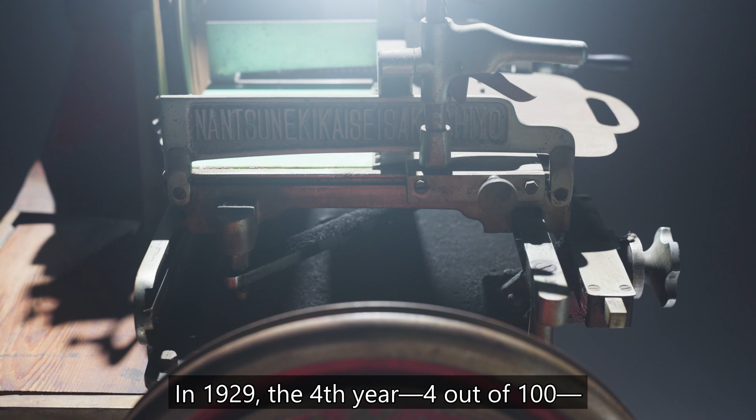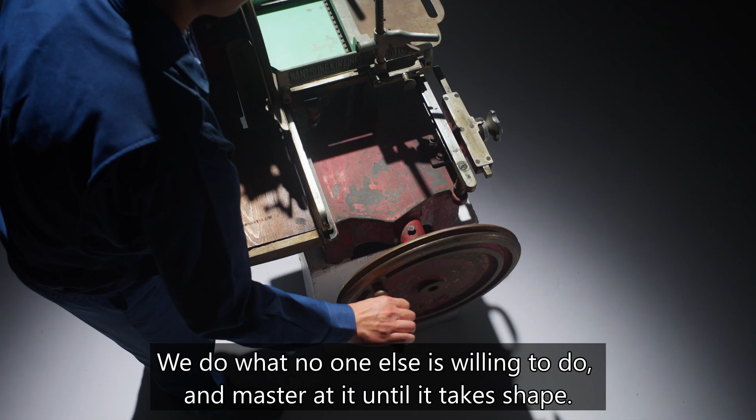In 1929, the fourth year out of 100, a request came in to manufacture replacement blades for ham and bacon slicers from the Dutch company, Berkel. We do what no one else is willing to do, and master it until it takes shape. From here, we took another big, significant step toward the future of food. We began manufacturing and selling Japan's first meat slicer.

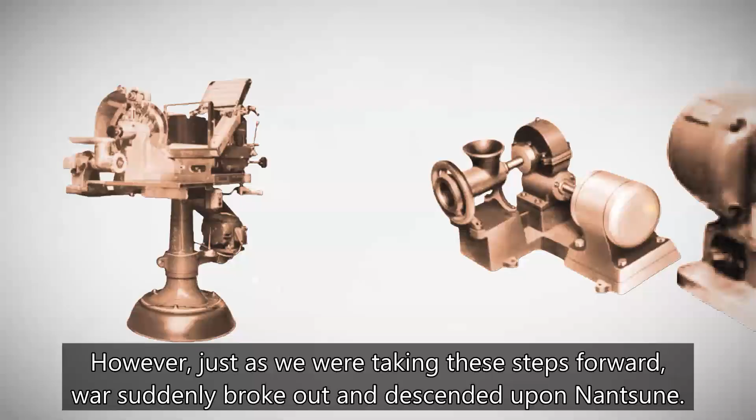We registered the Nantsune trademark and changed our company name to Nantsune Works. We developed the first domestically produced meat slicer. We progressed from the cutlery business into meat processing and machinery manufacturing. However, just as we were taking these steps forward, war suddenly broke out and descended upon Nantsune.

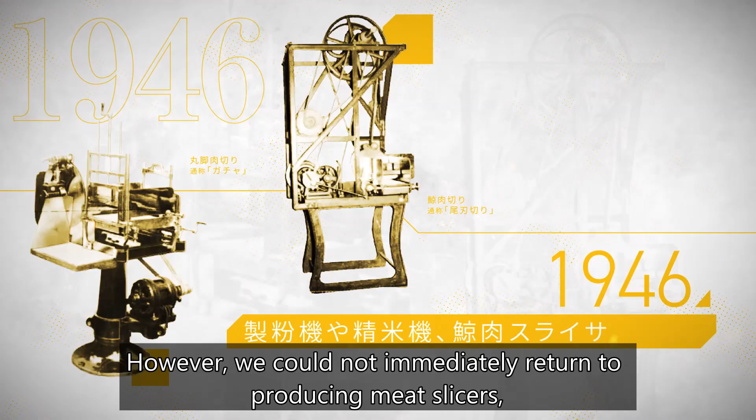In 1944, during the final stages of the Pacific War, both the factory and residents were relocated due to compulsory evacuation of buildings. Production was impossible. Overcoming the hardship of having our lifeline cut off, we resumed business in 1946 after the end of the war. However, we could not immediately return to producing meat slicers, so we responded to the needs that existed in other industries at the time. Even during difficult times, our commitment to supporting the food infrastructure became one of the sources of Nantsune's DNA today.

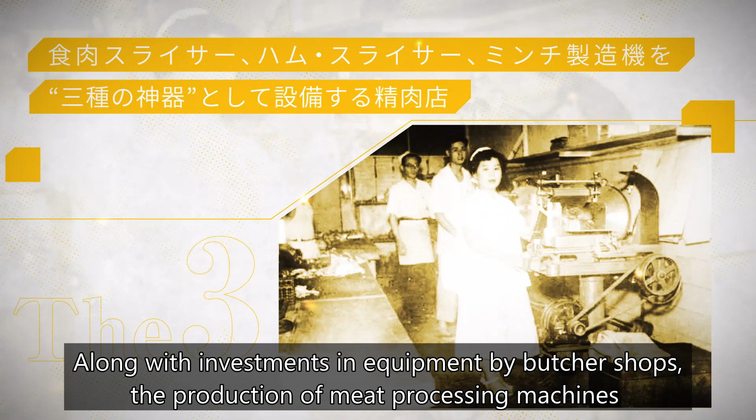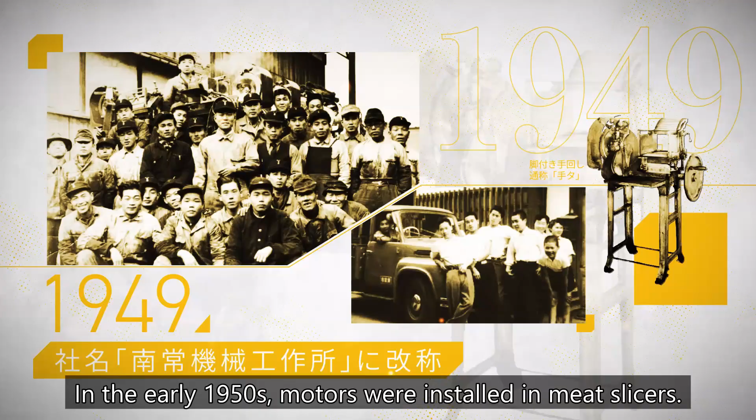With post-war reconstruction and economic growth, meat culture began to spread among general consumers in their daily diets. Along with investments in equipment by butcher shops, the production of meat processing machines began to gain momentum. In 1949, the company changed its name to Nantsune Machinery Works. In the early 1950s, motors were installed in meat slicers. This made it possible for anyone to achieve uniform slices. This excellent operability was widely supported, and meat slicers quickly became popular.

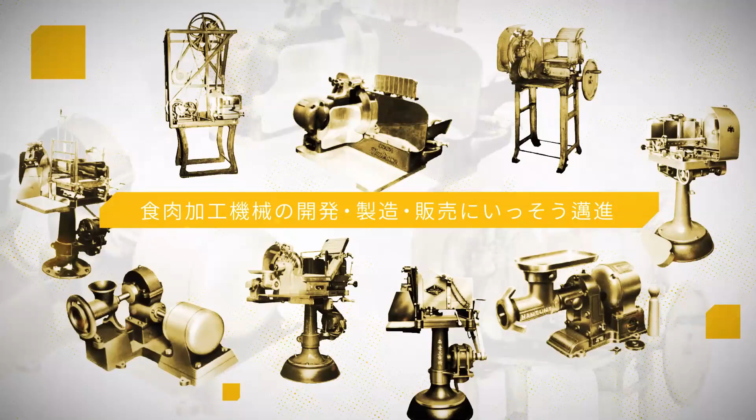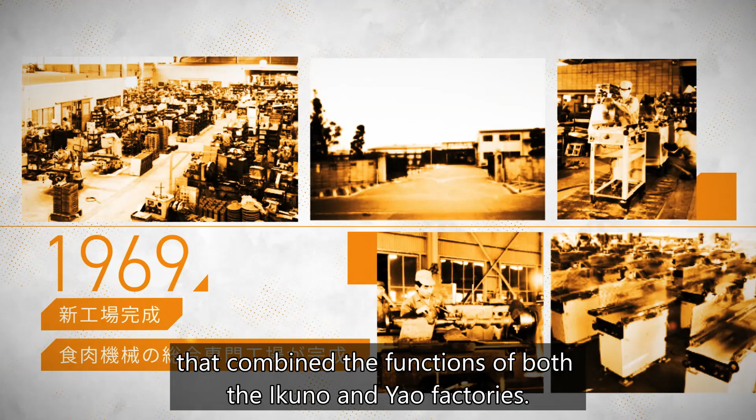That same year, the new factory was completed, giving rise to a comprehensive, specialized meat machinery plant that combined the functions of both the Ikuno and Yao factories. After the completion of the new factory, Nantsune contributed to the evolution of meat slicers through product development aimed at supermarkets. In 1972, we released Japan's first domestically produced high-top frozen meat slicer. This move anticipated the arrival of the frozen meat era.

At Nantsune, building on the foundation established in Japan during a period of rapid growth, we entered an era of breakthrough, paving the way to the global market. In response to rising raw material and manufacturing costs, we chose China as the location for our long-considered overseas production base. On October 24, 1985, a signing ceremony was held. We established Beijing Nantsune Meat Processing Machinery Company Limited.

Furthermore, during the rapid economic growth of South Korea in the 1970s and 1980s, an opportunity arose to expand our sales channels there. We signed a sales agency agreement for Nantsune products with a local freezer company. In 1985, Nantsune products attracted interest, and agency agreements were also established in Taiwan and Hong Kong. Within just 1 year, we established extensive sales channels in China, South Korea, Taiwan, and Hong Kong, forming a major Nantsune network spanning East Asia.

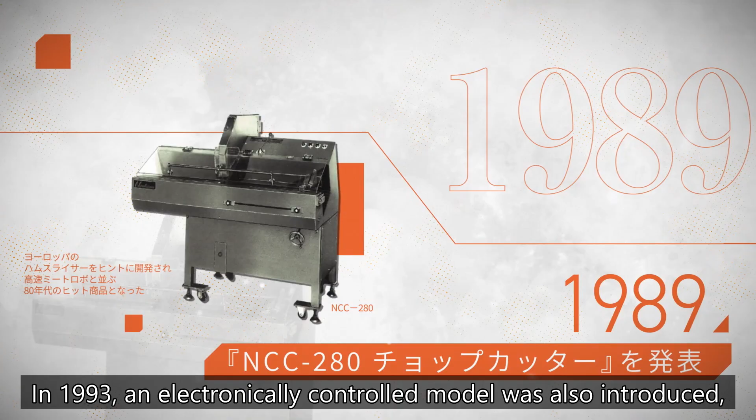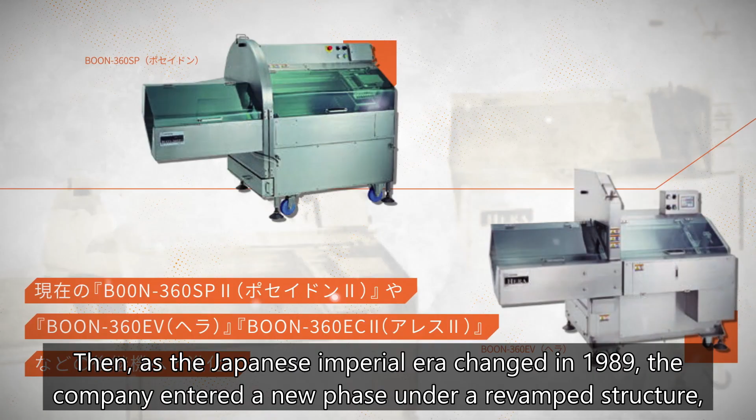Building on the overseas inspections that began in 1960, Nantsune continued to develop hit products. In 1989, we announced the NCC 280 chop cutter, domestically produced model of its kind. In 1993, an electronically controlled model was also introduced, followed by the successive release of new generation machines. Then, as the Japanese imperial era changed in 1989, the company entered a new phase under a revamped structure, further enhancing its international competitiveness.

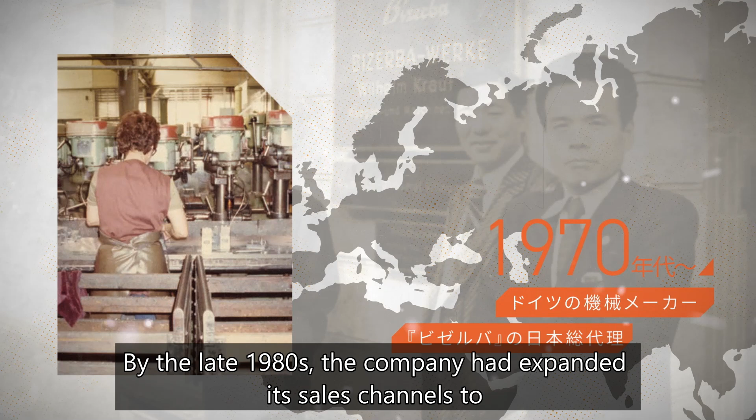In China, in response to increasing demand, the company continued to relocate and expand its factories after 1995, and in 2005 established Nantsune Food Machinery, Shanghai. In recent years, a branch office has also been established in the international city of Shenzhen. In South Korea, in 1999, Nantsune Korea was established. This has become a key base that continues to play a significant role within the Nantsune Group.

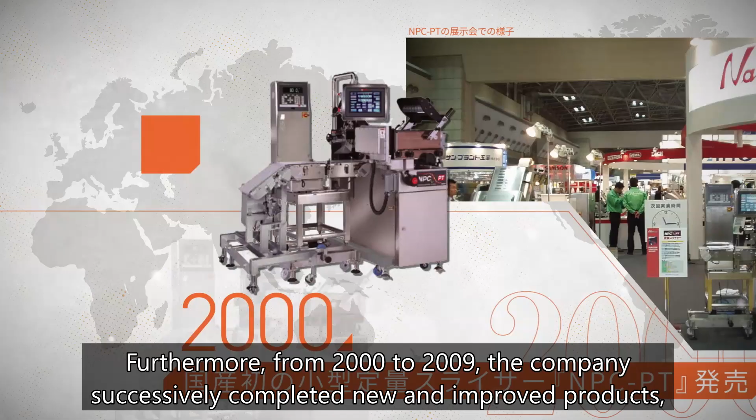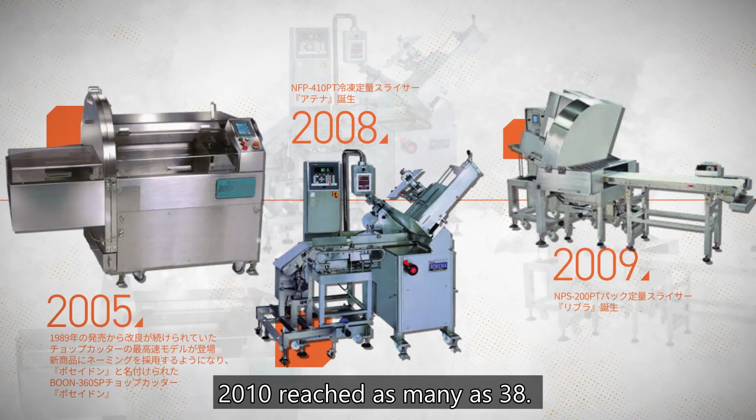Furthermore, from 2000 to 2009, the company successively completed new and improved products, which created a buzz at exhibitions such as FOOMA Japan and the Meat Industry Fair. Including overseas products, the number of products released to the market over the 10 years from 2000 to 2010 reached as many as 38. This experience later paved the way for the birth of Zeus, which would become the company's flagship model.

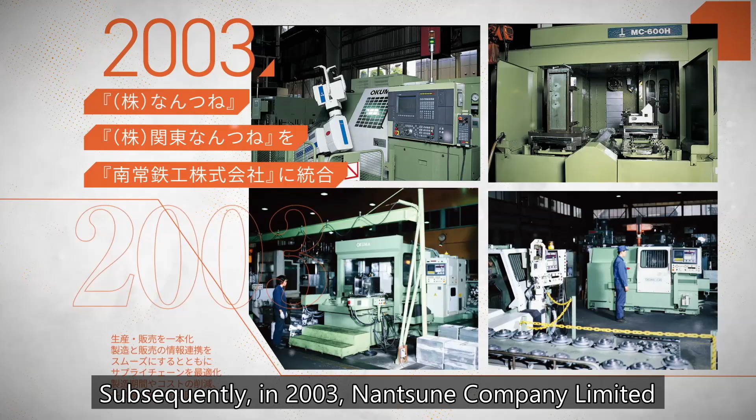In September of 2001, news of the outbreak of mad cow disease spread, and Nantsune faced its first-ever management crisis since its founding, with sales cut in half. In 2002, Tsunejiro Minami, the fourth-generation successor who had been away from the company studying abroad, returned to Japan and assumed the position of director. Subsequently, in 2003, Nantsune Company Limited and Kanto Nantsune were integrated into Nantsune Iron Works. Along with the organizational review, optimization of each business operation was pursued.

In 2005, Tsunejiro Minami was appointed executive vice president and began implementing management reforms. The company name was changed to Nantsune Company Limited, solidifying the structure for a second founding. In 2006, the first kickoff meeting was held. The management policies and corporate philosophy were shared, and this event became an annual tradition from then on.

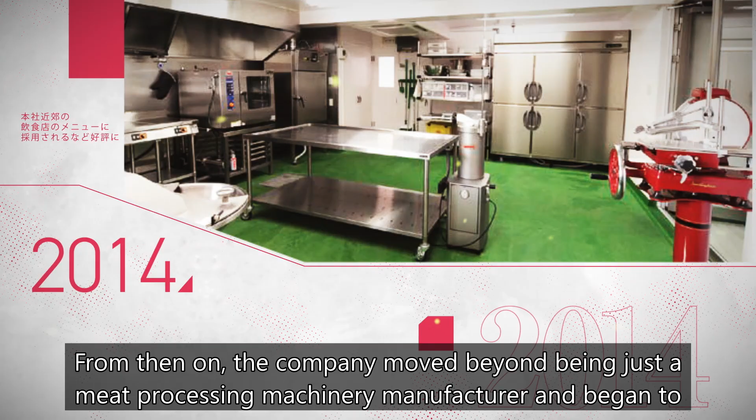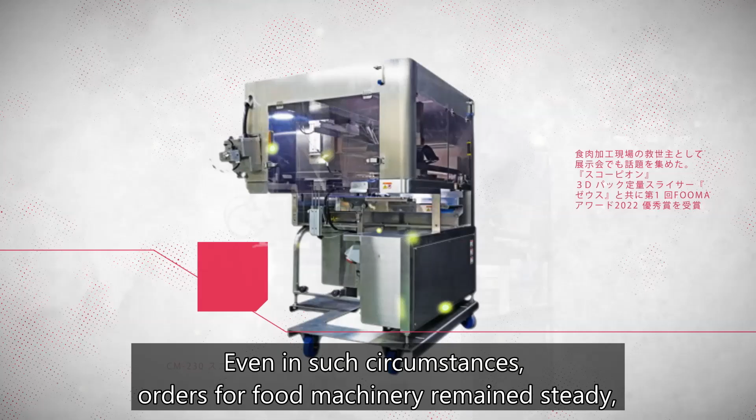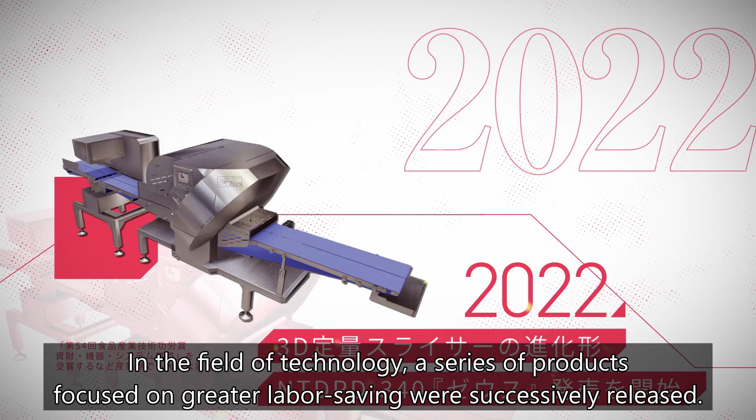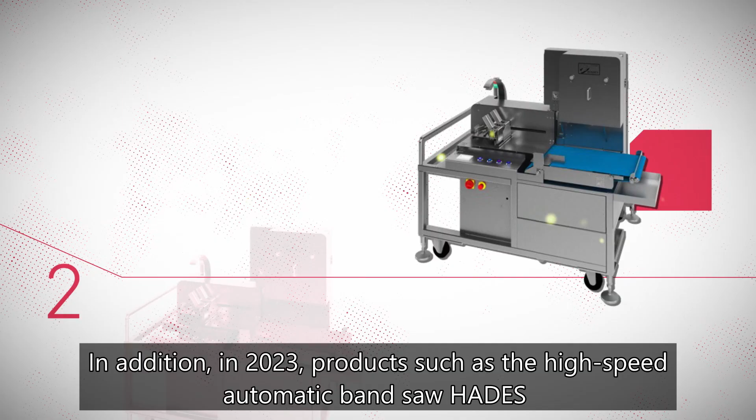In 2022, Gastrotech Holdings Company Limited was established as a holding company to unify the group. In the field of technology, a series of products focused on greater labor saving were successively released. Among them, the advanced 3D portion slicer, Zeus, which went on sale in 2022, became a major topic of discussion in the industry. In addition, in 2023, products such as the high-speed automatic bandsaw Hades and devices that automate the opening of carton boxes were also announced.

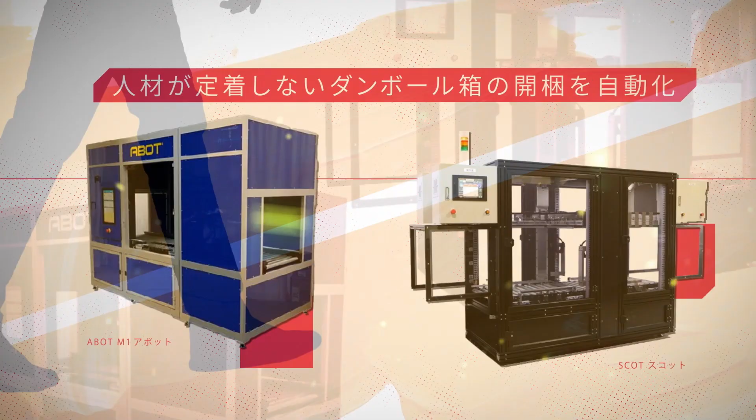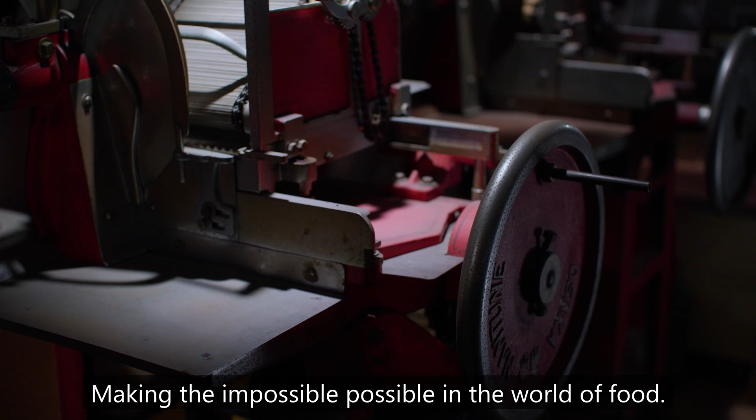Bringing thinly sliced meat to households around the world. Making Japanese cuisine a global culture. Not limited to traditional Japanese food, we want to bring a variety of Japanese dishes to dining tables around the world. As we celebrate our 100th anniversary, Nantsune is taking the next step forward with these aspirations in our hearts. Making the impossible possible in the world of food. The spirit cultivated during the era of Tsunejiro Minami still forms the core of Nantsune today, embodied in these words.

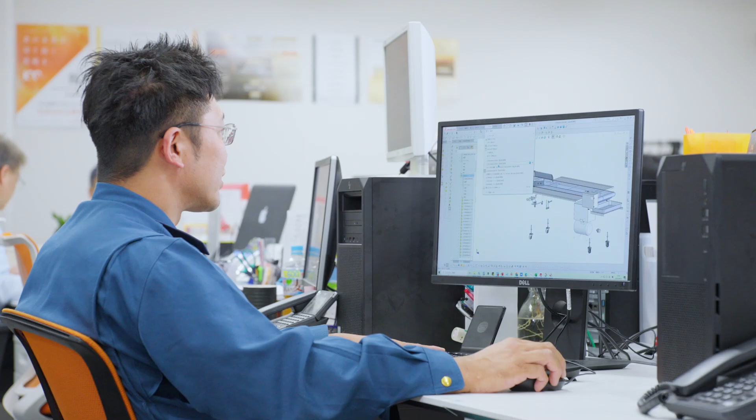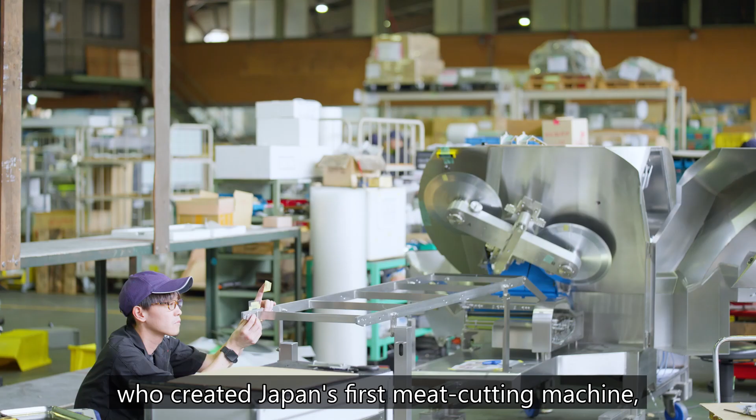Laying the foundation for food provision, someday, that may become a culture. Witnessing the very first bite taken somewhere in the world. We create dining tables filled with laughter, made possible by our services. We took our first step from a single blade. Because we were the ones who created Japan's first meat cutting machine, we can take the 101st step forward. Make the impossible possible.